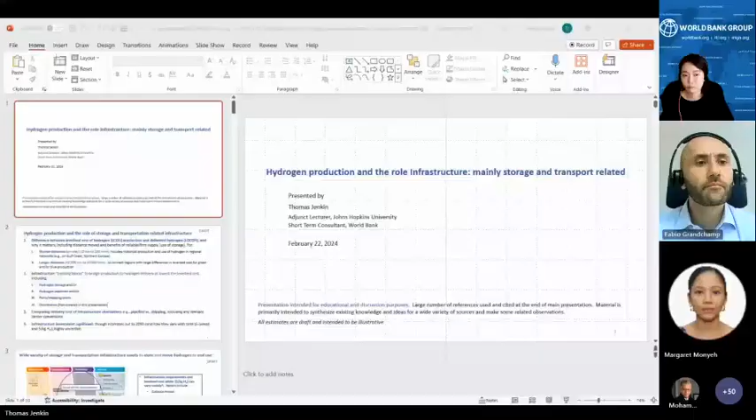Okay. It just popped on without that. Yes. Let me just pull this file. Yeah. Right. Sorry about that. Microsoft Teams is not my specialty, but we're set now.

So I'm going to be talking about the role of storage and transportation and infrastructure more generally.

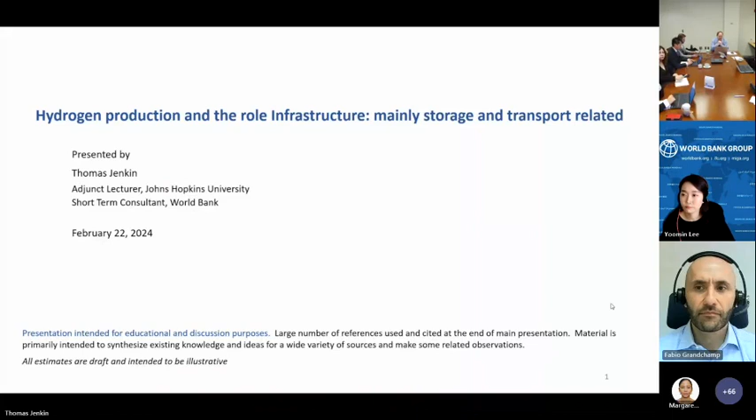Let me just start through this. So there's a significant difference between the levelized cost of hydrogen production and the delivered cost of hydrogen. And that's where we have to think about what you need to get delivered hydrogen. And that involves typically storage and then potentially moving the hydrogen a distance.

It could be short distances, and that has historically happened in places like Texas, where there is a network of hydrogen pipelines that connect hydrogen production, grey hydrogen production, to ammonia plants and something similar. But more broadly, people are thinking about there are large differences in the cost of green hydrogen production, or blue, and that you might be able to connect the production to regions where it would otherwise be much more expensive. So there's a lot of interest in transporting it longer distances.

And so in that context, we're going to be talking about giving a bit more background to these building blocks, which I would say bridge production essentially to delivery, and one's considering in the context of the lowest levelized cost. It's a very large area, infrastructure, and therefore, in 30 minutes, we're not going to cover everything, but the focus here is going to be on storage, hydrogen pipelines, and then considering them within the context of alternatives such as shipping and ports.

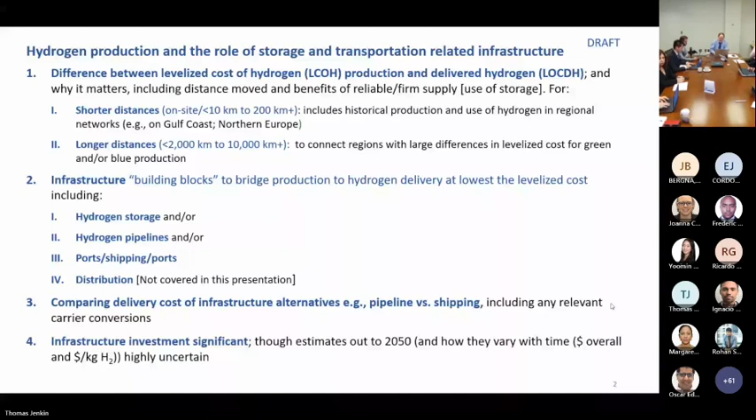Okay. So some of these slides, I'll jump through quite quickly. This is an IRENA figure that sort of just generally sets the scene: production, transportation, transformation, and end use. This transformation idea is that when you move hydrogen from A to B, you might actually sometimes not move hydrogen. It might be cheaper or more appropriate to use a different type of energy carrier, and ammonia is particularly thought of in that context with regard to shipping.

But infrastructure costs, in terms of what this adder is, vary very widely, and it's going to depend on the sort of factors one would imagine. The distance moved, the scale is in fact very important. Another thing is that when you connect the different building blocks, you have to make choices about the size of storage, the size of the hydrogen pipeline. For example, you might have hydrogen storage that comes from production, that enables you to level out your hydrogen that would go into a pipeline, allows for a higher utilization and therefore a smaller pipeline. So these things are all interconnected, and utilization is a very important part of this.

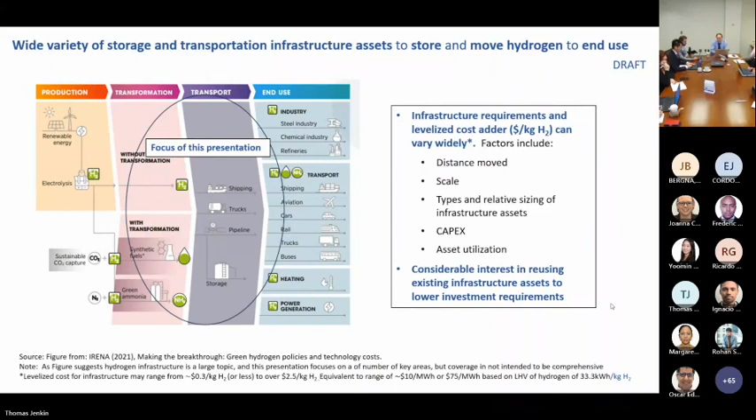One other thing from the research that I've done is there's a lot of interest in using existing assets where that's possible. Certainly studies that are looking at Europe in terms of the European hydrogen pipeline anticipate using a significant amount of repurposed natural gas pipelines. So we're going to step through the idea of storage first, then transportation, and then think about shipping and ports. So if we think about hydrogen storage, why have it?

Because the output of green hydrogen is variable on an hourly basis, on a daily basis, and in fact on a seasonal basis, because you'd be using wind or solar, you can use storage essentially to store some of that output and enable it to balance the demand. So that's one thing you might do, but storage might also be used over longer timescales. And in that context, underground storage is particularly interesting because it's a lot cheaper, we'll see, than above ground storage, and also a lot cheaper than battery energy storage.

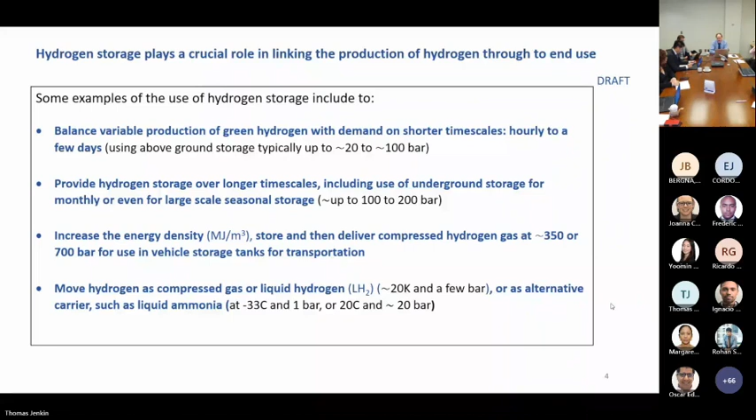An area we won't talk much about in this talk is that it's also considered for potential use in transportation, in which case you'd actually store it at something like 350 or 700 bar. You'll see that the storage that happens above ground is typically limited to about 100 bar, and it can be a little higher than that if you're doing it underground. So a picture is worth 1,000 words.

Both of these examples are using above ground storage, and you can see it in the figures. On the left hand side, which is a 260 megawatt electrolysis plant in China, you can see the 10 spherical hydrogen tanks where the arrow is. And on the right hand side, for a smaller 20 megawatt electrolysis plant in Spain, where the hydrogen is going to be used as a feedstock for ammonia at an existing plant, you can see those 11 cylinders. And typically for above ground storage using tanks or cylinders, it's of the order of 20 to 60 bar.

You get much higher pressures like 350 and 700 bar for transportation because you're dealing with typically much smaller cylinders. And in fact, there's another way of doing it, which is you can use pipelines. You can use natural gas pipelines, essentially, but you close off the ends. And in terms of the sizing of this storage, I talk about sizing in terms of average daily production.

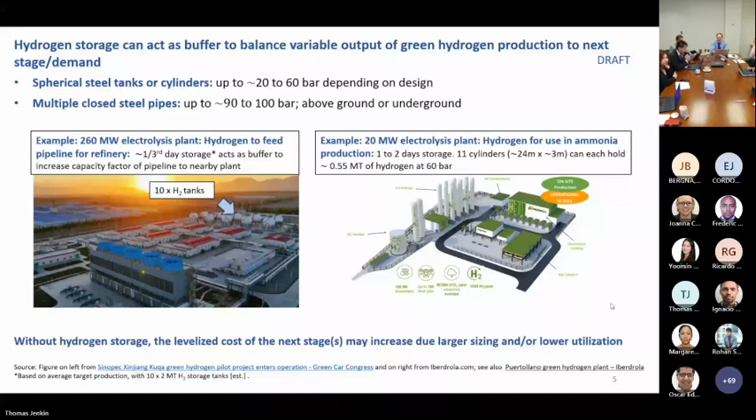So the example on the left-hand side has enough storage for, on average, 1/3 of a day's storage. And on the right-hand side, the plant has enough for 1 to 2 days storage. So as well as balancing supply and demand on an hourly basis, you also might well have it for reliability. Certainly that's what's being done on the right-hand side, where they're thinking about having some backup storage to enable the ammonia plant to continue to run at a high capacity.

So we've done some levelized cost calculations of what the actual adder is. And you can see on this figure on the right-hand side that I've got an example where you've got 1/3 of a day's storage, 1 day's storage, and in fact 2 days storage. And I've broken out what the levelized cost of that storage is in terms of capital recovery for the storage, for compression, and electricity. And so what you'll see is the top 2 bars, the compression and the electricity, are the same in each case, but you're having to pay more if in fact you have more storage.

And I think really the takeaway from this is 0.3 to 0.7 dollars per kilogram isn't a trivial number when one thinks about a lot of people discussing we can get this low cost hydrogen production. And my sense sometimes is with infrastructure, as you build it up, there's a possibility you might miss a component, and that could be valuable. Because this storage is what allows the downstream infrastructure assets to have the high utilization that's often assumed to give them the low levelized costs.

And on the right-hand side, you see liquid hydrogen, which is significantly more expensive. It's shown there at about $2 per kilogram, and certainly people are hoping to get it down to $1 per kilogram or less, but it is expensive.

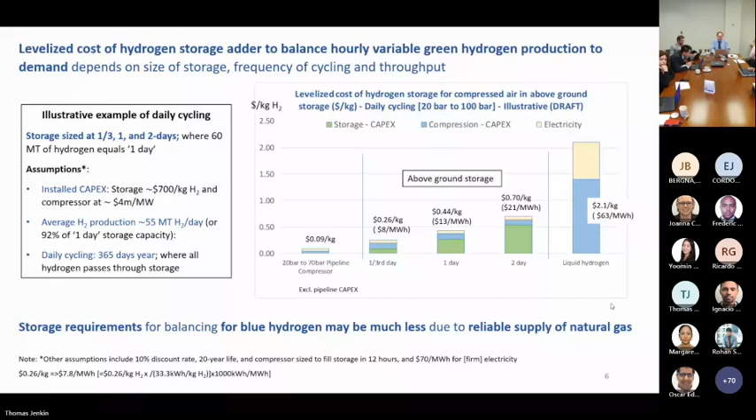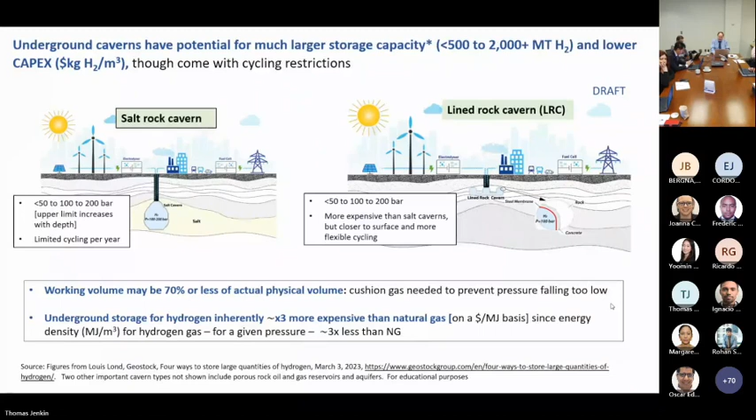So this is looking at underground storage. And what it's saying is that the cost of underground storage can potentially be 10 times less than the cost of above ground storage. And that's $500 per kilogram versus $50 per kilogram. Now, I've actually translated that into kilowatt hours, because it's quite interesting if you look at that. $15 per kilowatt hour versus even down to $2 per kilowatt hour. And so you can see that within the context of battery storage, arguably, when you move to certain types of batteries, it could get a lot cheaper. But if you're talking about something like $100 plus per kilowatt hour, these are very big differences for large scale seasonal storage.

What makes the cost of storage a little higher when you're using a cavern is that you're not typically using it for daily storage, filling it every day. You're using it on seasonal storage, and you might have 20 days storage or so. So those things factor into what the levelized cost is.

But it's still going to be, well, let's just leave that there. I might come back to that a little bit if I have more time, which I know I won't.

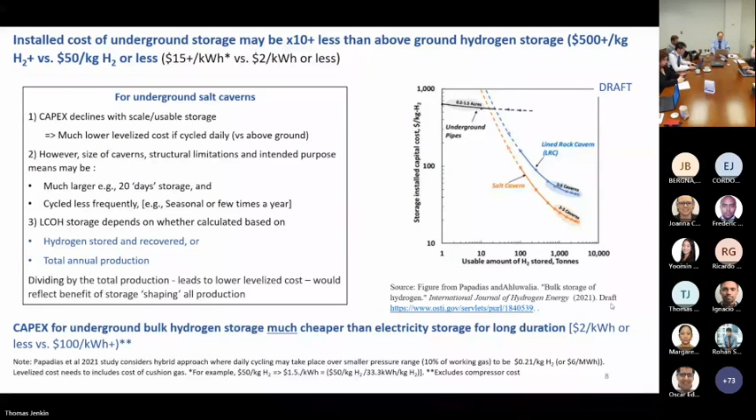So I'm just going to show you liquefaction of hydrogen storage. Again, we're trying to get through a number of ideas here, just to give you a sense of what's involved in storage. So it's very expensive. On the left-hand side, you see the bar corresponding to 1 is actually over $2.50. And then it's showing how it could go down under various studies.

So why would you use it? It's about 10 times denser on a per unit volume basis than if you compress gas to 100 bar. So that's a good idea, but it's very expensive. And the reason it's expensive mainly is that the liquefaction process takes up about 1/3 of the lower heating value of hydrogen, which is a lot. And also the capex associated with liquefaction is very high.

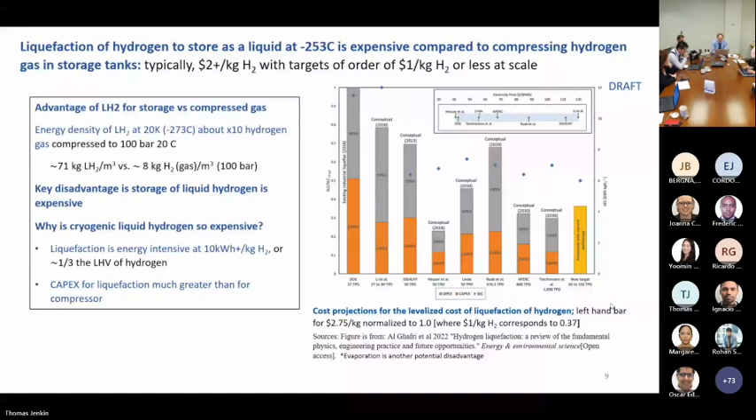So that's storage. We're on to hydrogen pipelines, and I'll acknowledge that Dov warned me about putting too much data on. So perhaps if this is circulated at some point, people will see this in more detail. But on the right hand, the main point is you see a natural gas system that's in fact a hydrogen system. They're very, very similar.

You've got hydrogen production from different sources. You can see the storage we just discussed, and you compress the storage, in this case, 100 to 200 bar. Or you could avoid the storage and go directly into the transmission pipeline. There's a distribution pipeline. So there are big similarities between hydrogen pipelines and natural gas pipelines, to the point that Europe is strongly considering large amounts of using existing pipelines.

And the reason is that you can use steel pipes, you can use underground caverns, and these flow rate formulas look very similar, whether or not you're dealing with natural gas or hydrogen. The big difference is what I went back to earlier, that for a given pressure, the energy density is only about 1/3 what it is for natural gas, which really would mean that if I didn't do anything different, I'd have to have three times as many pipelines, or I'd be delivering 3 times less gas.

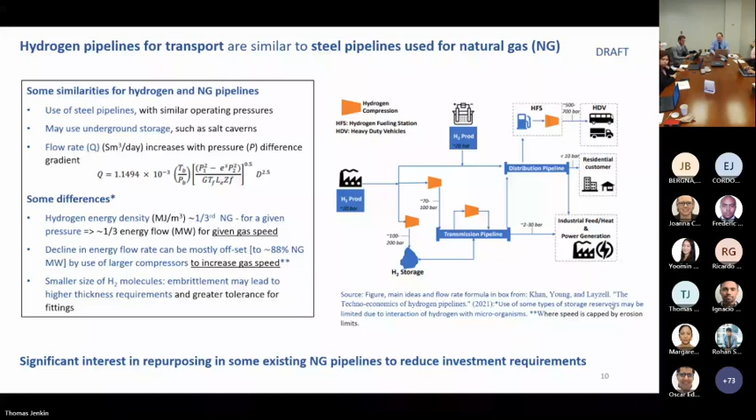So what actually happens is you beef up your compressors to about 3 times the power, so that you actually can push through the volume at 3 times the rate. It's slightly limited. You can see it says 88%, because there are limits to how fast you want to push the gas through the pipeline, because it can cause some damage to the surface. There's some other issues associated with embrittlement and leakage that people have to think about, but overall, significant similarities.

So we're talking about hydrogen pipelines and the cost of hydrogen pipelines. So there's a number of studies that look into this, and it is not uncommon to come up with an estimate like 0.2 to 0.3 dollars per kilogram per 1,000 kilometers traveled. Now, implicit in those estimates are that they are using large pipelines, typically 48 inches. They're talking about 1 or 2 million metric tons of hydrogen a year. And that's what's sort of indicated on the chart that we've got here.

You've got a Canadian study and a Gulf European study, which have 1.5 and 2.5 million tons per year. And they're represented by those stars that fall somewhere between 0.2 and 0.4 dollars per kilogram per 1,000 kilometers. But if you look at a number of studies that do these calculations and you go to smaller diameters, 36 inches, 20 inches, which correspond to lower annual delivery of hydrogen, the cost can go up significantly. And this Canadian study is an excellent study that looks at this in great detail across a range of scales.

But I think my point here is people may be talking about building 48-inch pipelines from Saudi Arabia to northern Germany, but you wouldn't be talking about doing it with a 20-inch pipeline, or you'd be talking about very different costs. And I've done some sensitivity analysis here. On the left-hand side, you see the cost per 1,000 kilometers for a 48-inch pipeline, a 36-inch pipeline, and this is from the European Hydrogen Backbone.

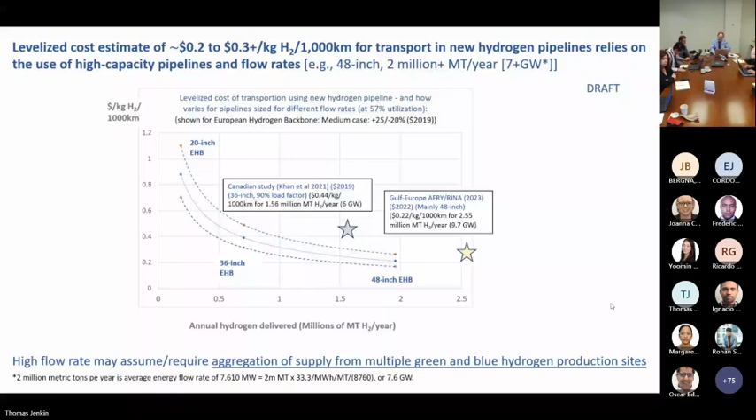I should point out quickly that these curves that you see, with the dots, are also from the European Hydrogen Backbone. Those are their estimates for a new pipeline. But if I change things, I mean, we use back of the envelope calculations in a way with a spreadsheet, but we can get quite close to the internal.

Our internal estimates are similar to EHB, and then I revise it for a revised capex, discount rates, and capacity factor. And the takeaway here is these numbers can move quite a lot. And yeah, you certainly can see there's one that's over 0.7 dollars per 1,000 kilometers, and that's very different from 0.2. So these are the sorts of things one would factor in.

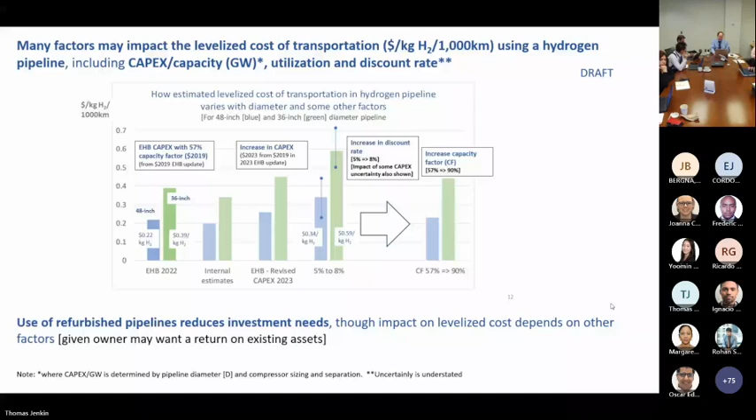That's the pipelines. And then the idea would be, if you were thinking about pipelines going from A to B, certainly people are considering an alternative in terms of shipping. And ammonia is the one that people think a lot about. And here on the right-hand side is a figure from Hydrogen Insights from 2021 that's showing an example where you go from Saudi Arabia to Rotterdam, and you've got ammonia, liquid hydrogen, and alternative carrier.

I think the real takeaway as I look at this is the error bars. They're large. You look at the top one on the left-hand side for ammonia, dehydrogenation. What that actually means is that after you've shipped it as ammonia, you may want to take it back to hydrogen. And the number they're saying is $1 to $2 per kilogram to do that. And that seems enormous in size and also in variation.

So that's quite interesting, because perhaps you don't want to change it back to hydrogen and you can use it as ammonia. So I picked this number of 8,700 so that we could compare it to this study and a number of other studies. The way you can figure out what these costs are is you have to worry about what's going on at the port itself. And so I've got some ammonia plants, I've got a pipeline, I've got refrigerated liquid storage, which is interesting in the sense that the number of days of storage would often be something like 15 days production.

And it's 15 days production, could be more, for two reasons. One of which is to allow the ammonia plant to keep producing. And the other side of it, perhaps more importantly, is that when you've got the ship, you want to fill it up. So in this particular case, you're seeing

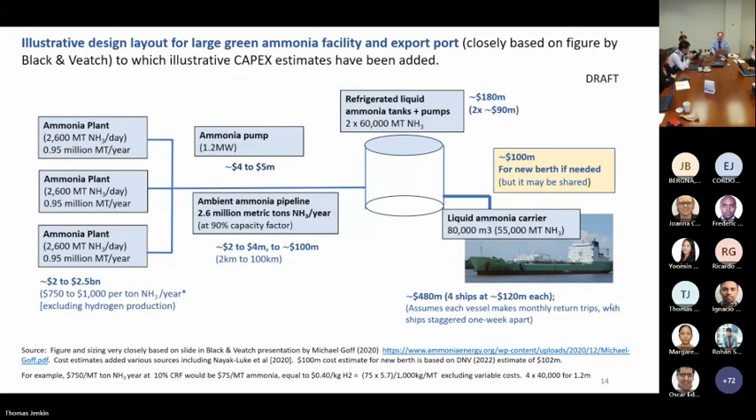4 ships arriving every week, well, one ship each week could basically take this 2.6 million metric tons of ammonia per year. And by contrast, NEOM, which people talk about quite a bit, is a little under half of that. So you could do something similar with ships that were half the size of this on this sort of scale. But it's quite interesting to look at that 15 days ammonia storage, because this will show you why people come up with different values.

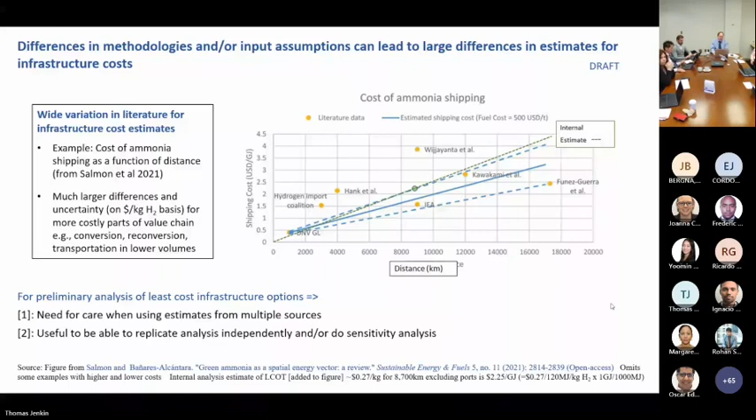I'm going to just touch on this slide. We talked a lot about liquid ammonia, and the reason we talk about liquid ammonia rather than liquid hydrogen, which seems to be consensus, at least in the near term, for a number of studies, is because for physical reasons, the cost of shipping liquid hydrogen will be 1.5 to 2 times higher than the liquid ammonia carrier. The reason is that the energy density of hydrogen, while much higher on a unit mass basis, is much lower on a unit volume basis.

At the end of the day, you would need to have 3 hydrogen vessels for every 2 ammonia vessels to move the same amount of energy. And you also have to pay more for your liquid hydrogen vessel because of the refrigeration facilities associated with keeping something that cold, rather than ammonia. Now, it's more complicated than that because it depends on the cost of the liquid hydrogen versus the cost of the liquid ammonia at the port. And you have big advantages: you don't have to crack it back at the other end. But these are the sorts of things to consider.

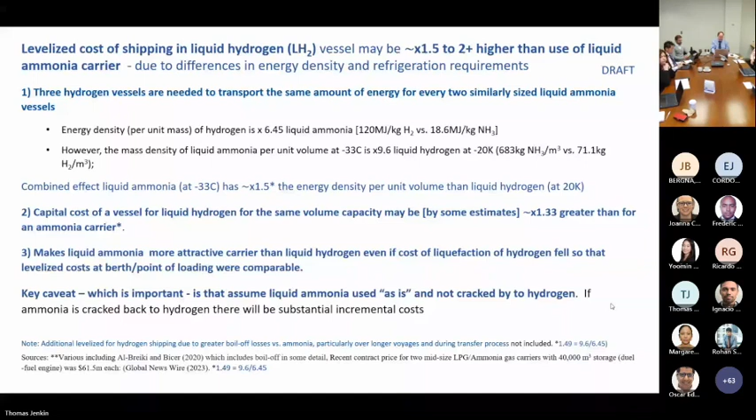I think it's an interesting question, given that goes from the eastern side of Saudi Arabia, or Qatar actually, across to Neom and places like that, whether you can use a pro rata basis and it might be cheaper than $1.32 over shorter distances. But the takeaway is that this $1.32 is in fact lower than the shipping costs, or at least quite close. So perhaps if you had very large volumes, there does seem to be a case for these pipelines, but at lower volumes, you can understand why people are talking about shipping.

Okay, so this is really the last slide I really wanted to show for certain. It's showing this relationship between pipeline sizes and shipping. So what you've got is the levelized cost of transportation, somewhere between 0 and $4.5 per kilogram of hydrogen, and the distance traveled. And so you'd imagine that there might be, and certainly many studies do this, a linear increase in these costs with distance. The question might be where the intercept is.

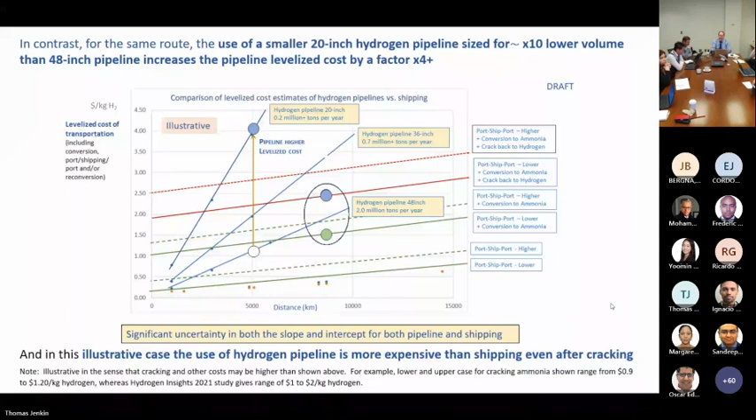So what we see is that in this particular case, under this illustrative example, the pipeline was cheaper. But if in fact you had a much smaller pipeline, then it's not even close, and then it's much cheaper to do the shipping. So that's what I'd say. I think I'm finishing there. If these ever get circulated, you see a few more slides.

And this is with me just really focusing on a number of areas. I really haven't talked about distribution, transportation, but my instinct is people can underestimate the infrastructure you need and just assume it's there and give themselves very low utilizations for their other assets. Scale matters enormously, and I really will stop there.

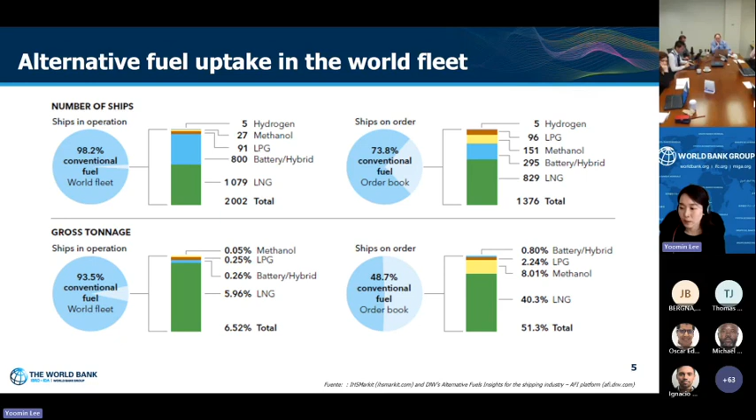And of course, there has been a long discussion on the chicken and egg problem and alternative fuel uptake. However, I personally believe that this conversation is now outdated. Now we clearly see that there is strong demand coming and a growing number of ships in operation for carrying them, as you can see from these graphs. In a recent conversation we had with Maersk, one of the biggest shipping companies, they're also planning to order more alternative fuel powered ships as soon as the engines become available. And we see that coming very soon.

So to navigate this grand transition with our clients globally, we followed a two-pronged approach to make sure that the Global South is also engaged in critical conversations and benefits from this transition, not leaving anyone behind. The first is global analytics and policy work, and the second is engagement in our client countries.

In our global analytics, for example, we carried out an assessment among all countries and identified prime producers for future zero carbon shipping fuels. Those fuels can be green hydrogen, but also green methanol and ammonia. Many of the countries that we work in have a significant renewable endowment, which makes them very suitable to produce ship fuels for the future. This can unlock new development opportunities and realize co-benefits such as clean energy and job creation.

Specifically, we analyzed the three main categories of zero carbon bunker fuels to see which has the best potential to replace heavy fuel oils for ships. One is biofuels, where biomass from plants and agricultural waste is transformed into fuels such as biomethane, bioethanol, or biomethanol. The second, what we're currently discussing, is hydrogen and ammonia, where green hydrogen is made from water using renewable electricity, and blue hydrogen, which we also looked into, is made from natural gas, where we capture the carbon and store it securely to keep it out of the atmosphere.

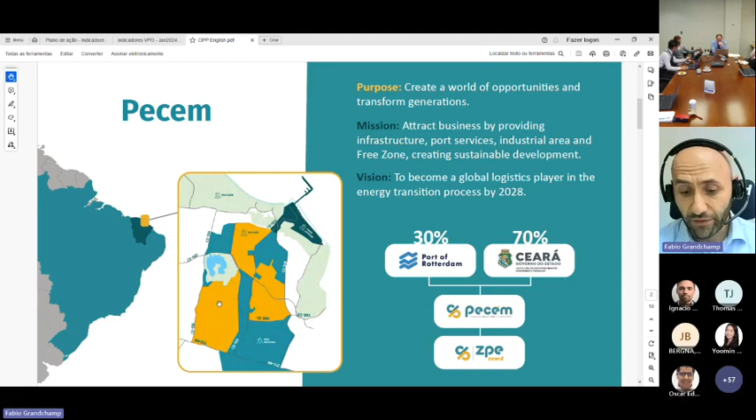The business model that we have as a company is a platform for development as an infrastructure provider, and in that sense, energy transition, in particular green hydrogen, is a huge opportunity for us over here. So as you can see in many studies, Pecem has a very important and competitive position, and of course that brings us a huge potential in attracting billions of dollars in investment.

So when it comes to this opportunity, and we combine it with our business model, which is providing infrastructure, we basically have two interconnected challenges. First of all, bear in mind that the green hydrogen market is not yet mature. Many questions and uncertainties are still there. So the first challenge that we have, and that goes a little bit in line with the presentation of Thomas, is that we have to provide infrastructure in a way that helps keep the competitiveness that we have, and not damage our competitive position.

So until market maturation is there, and we cannot really tap into the full potential of economies of scale, what we're doing is we created this concept of a green hydrogen hub, which is a concept that has its foundation on shared infrastructure, so that we can combine and pool all the volumes of the different producers together, reduce costs as much as we can, and keep up with the competitiveness until the volume is high enough to have more dedicated infrastructure.

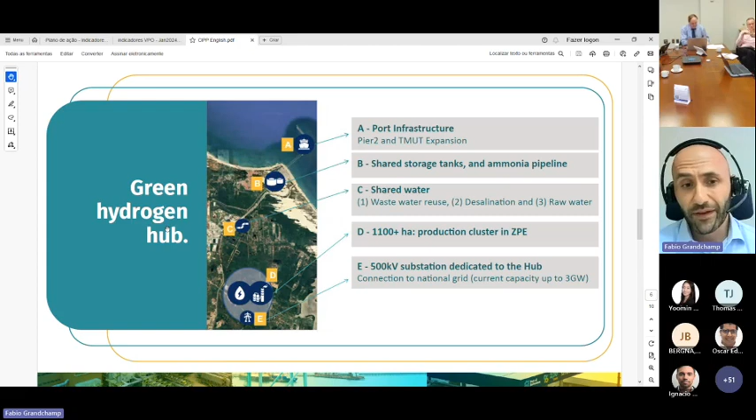And the third one is really the network, the pipeline network connection between production and storage, and then afterwards the ship operations. So all being used in a shared way in order to optimize costs and competitiveness. So that's basically what we envision in order to create an environment, particularly to support the ramping up phase of these different plants. But at the same time, we also need to make sure that the infrastructure is future proof, and that's basically our second challenge.

And in this second challenge, we have the support of the World Bank in expanding our port infrastructure with the expansion of two piers that we have, and they're both going to support green products, be it directly with ammonia, for example, but also other green products that will benefit from the green hydrogen or green fuels that we're going to have available in the complex. Part of this infrastructure is really connecting the production zone through a service corridor that connects this production with the port directly.

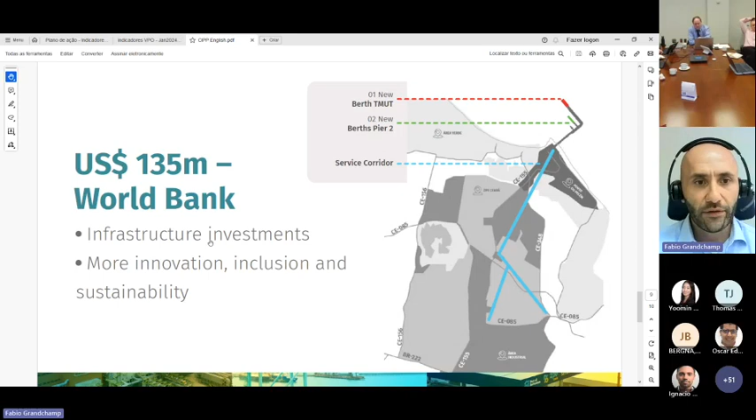So this is basically how we are addressing infrastructure in these two points. One a little bit more focused on making sure that we provide the right environment for the projects to take off, and the second really in a more sustainable way, providing infrastructure for the longer term. So that's basically what I wanted to share with you.

I hope that's clear, and I would love to receive some questions and have a discussion about it. Thank you. Thank you very much, Fabio. Very interesting presentation again, and I think the three of them are very complementary, and we are already receiving several questions over the chat, which is great. Maybe we should start by summarizing the questions on the chat, and we can take it from there. Please raise your hand online, and we have a few other colleagues in the room.

There's an overall question about the need for adaptation of boats and ships that we already have at the moment for transporting ammonia. That's one. There is another technical question for Thomas about the figures you gave, on whether the cost per kilometer assumes new pipelines or repurposed ones. Shall we answer? Okay. The other questions may also be for you, and there is another one, also about transport of ammonia. I was not able to finish reading it, but that question is from Rico, who has been quite involved in some World Bank studies. Rico Solomon can ask it verbally as well.

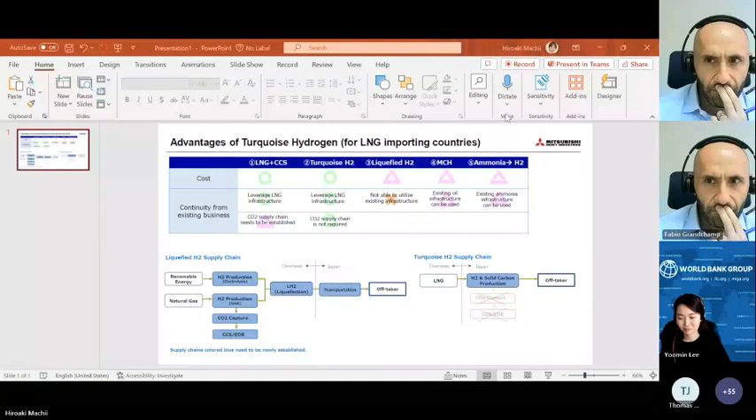Thank you so much for you all to share the very sophisticated viewpoint between green hydrogen versus green ammonia. But on the other hand, I'm quite interested in the importers' perspective in terms of competition between the green one and the blue one, and especially one of the biggest impacts that importers are very interested in is turquoise hydrogen.

This is a Mitsubishi paper. According to them, since turquoise hydrogen does not emit CO2, importers like Japan or Korea just import the LNG from Houston or from Brazil by LNG ship, and then they can convert it to carbon and hydrogen. Again, no emission of CO2. So only the catalyst equipment is needed, and no other new equipment is needed. So as far as I understand, one of the biggest importers like Japan is very conscious about this impact in the future, compared to the cost of hydrogen or ammonia.

So may I ask? Actually, I'm quite unclear to which of the three experts I should ask. But if any of the three experts have any opinions, I'd like to hear your insight. Thank you.

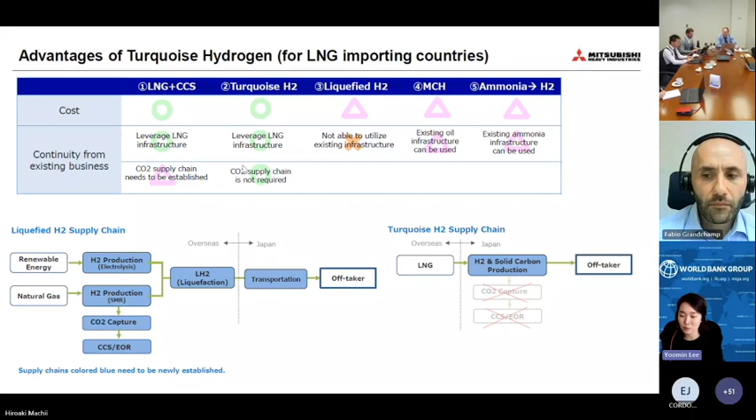So pretty much very similar to what the port sector is currently seeing as of now. It might take some time to get there, but there definitely is an interest in that. And I also wanted to ask the... Hiroaki, I actually couldn't understand what the exact question was. So I know that you've shared your screen and you tried to ask a question. But yes,

my simple question is that we learned here the comparison between green hydrogen versus green ammonia. But I'd like to know your insight about the comparison with turquoise hydrogen. I mean, it's not blue, accurately speaking, because for the importers, turquoise hydrogen should be one of the most cost competitive options, including the capital cost. So that's why I'd like to know if you have any insight about it.

So basically, of course, when we are talking about green hydrogen, and also, like I said briefly through my presentation, we've also looked into blue hydrogen, which is made from natural gas. But we did not specifically look into turquoise hydrogen or anything more granular than that. So from my end, I wouldn't have anything to add further than that. But I don't know if Fabio or Thomas, if you have anything to add on that.